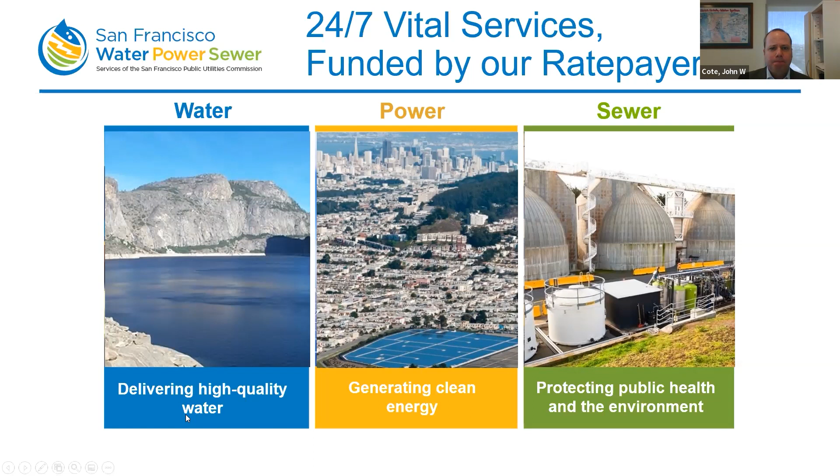Additionally, we provide sewer services to the City and County of San Francisco. And our sewers and our wastewater treatment plants are the front line protecting public health and the health of San Francisco Bay and the Pacific Ocean. Next slide, please. So I'm going to just quickly give you an overview of our water and sewer systems and some of the key investments that we've been making. Next slide, please.

So we operate the Hetch Hetchy regional water system. It provides high quality drinking water to 2.7 million people in 4 Bay Area counties. The last fiscal year, our system delivered about 182 million gallons of water per day on average to San Francisco and our 27 wholesale customers. These wholesale partners also share the cost of system maintenance. They pay 2/3 and we pay 1/3 of those costs. So the system and the really high quality water it provides is one of the fundamental underpinnings of not just the economy of the Bay Area, but also the vitality of our region.

There are a few things that are unique about our system. One is that the majority of our water, about 85%, comes from snowmelt that is stored in a natural granite basin and is so clean, there's no need for filtration. Filtration is energy and chemical intensive, and it can also be costly. The water is delivered via gravity to the Bay Area, so no fossil fuels or pumps needed there. As the water flows to San Francisco, it generates clean, renewable energy that powers not only San Francisco's municipal services, but also things like public and affordable housing sites and some new residential and commercial developments.

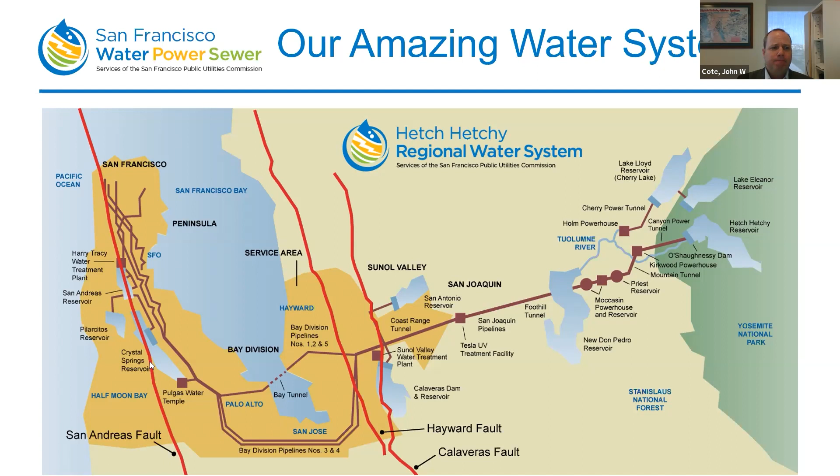Now, paid by your monthly bills, our services are always on. We've continued to deliver safe, reliable water through droughts, earthquakes, and the recent pandemic. Dependable, high-quality water is going to come out of your tap 24 hours a day, 7 days a week.

Our systems and staff conduct around-the-clock water quality monitoring. We also conduct regular inspections and preventative maintenance. And we have crews on the ground to carry out planned and emergency repairs across the city. Next slide, please.

So your investments have already made great progress. The multi-billion-dollar water system improvement program, which is to repair, replace, and seismically upgrade the most vulnerable portions of our water system, that is almost complete. So after more than 10 years and 87 different projects spanning 7 counties in California, the water system improvement program is more than 99% complete.

Now, the promise of this program is that within 24 hours of a major earthquake, we can deliver water to our customers. The program fortified major pipelines where they cross those earthquake faults we saw in the previous slide. It upgraded water treatment plants and reservoirs, also drilled 3 new water tunnels, and we rebuilt an entire dam in Calaveras. This program has really become the model infrastructure program that utilities across the country are now emulating. So part of your rates pay for these critical investments, and we thank you for that.

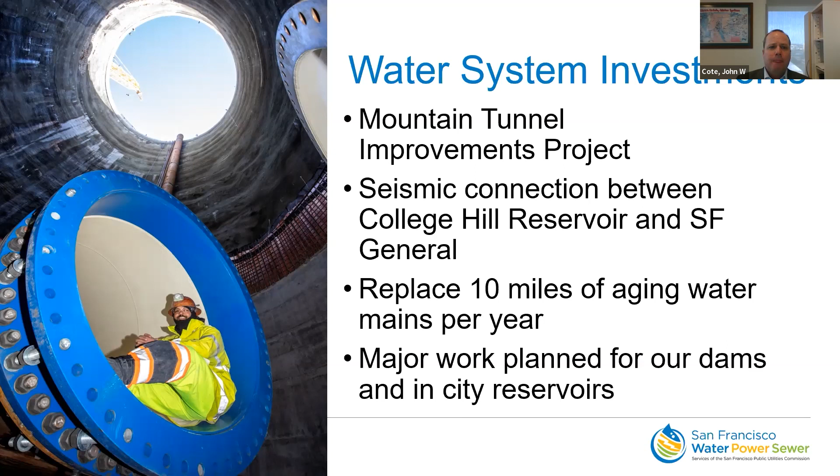So we must continue to invest in our water system so that it is resilient to droughts, earthquakes, and climate change. In addition, new state regulations might reduce the amount of water that we can serve from Hetch Hetchy in the future. So therefore, we've been working hard to diversify the water supply by adding a mix of new supplies to our regional system. Conservation is also a very important part of protecting our water.

And our residents in San Francisco have some of the lowest water usage in the state. And for that, we also thank you. However, conservation on its own is not enough. Next slide, please.

Now, with the major improvements needed to the water system either complete or nearing completion, much of our attention is now turning to our sewer system. So San Francisco is the only coastal city in California with a combined sewer system. And that means it collects and treats both wastewater and stormwater. So our sewer system is the first line of defense for protecting public health and the health of the bay and the ocean. The majority of cities in California discharge polluted stormwater untreated into water bodies. We do not do that.

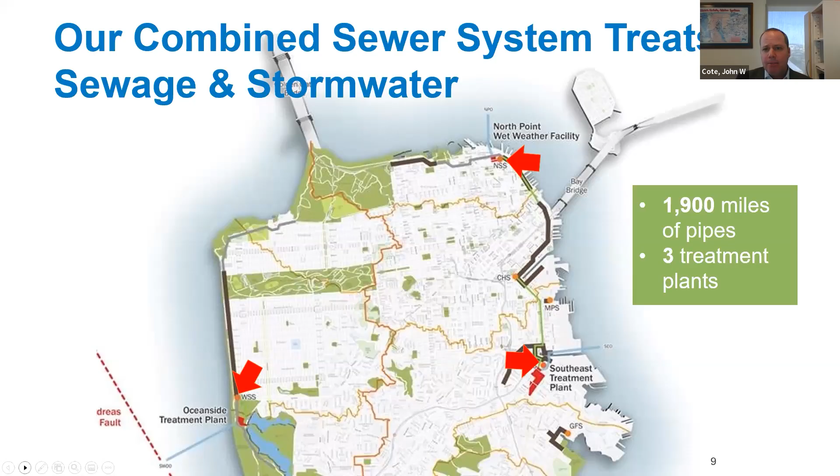So here you can see some of that need. So improvements are needed for both our sewers and for our treatment plants. As I mentioned, we know the next earthquake is really a matter of when. It's not if. So upgrading our aging water and sewer systems isn't just an investment in our city's infrastructure, it's an investment in public health. As we do with our water system, we replace roughly 15 miles per year of our aging sewer pipes, but really we are in a race against time to upgrade our old sewers.

We're also witnessing more and more intense storms due to climate change. I imagine everyone remembers earlier this year, we had a severe bomb cyclone that dropped over 5.5 inches of rain in a 24-hour period. So system upgrades that we're investing in will help reduce flood risk from these more intense storms. Next slide, please.

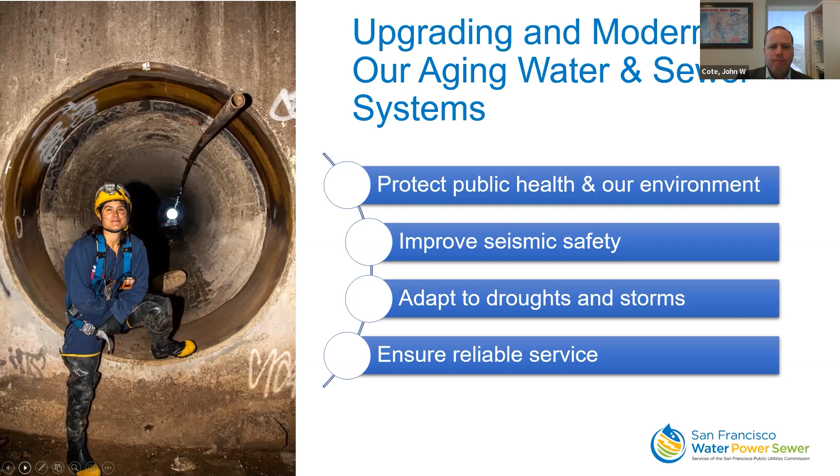So the year this photo was taken, William Howard Taft became president. New Mexico, Arizona, Alaska, and Hawaii were not even states yet. So what year do you think this was? We'll give you a few moments to ponder your answer, and keep in mind, there's no penalties for guessing. So even if you're not positive of the answer, it doesn't hurt to guess. So why don't you give it a shot? We'll give folks a few minutes to complete that, and then we'll of course tell you the answer.

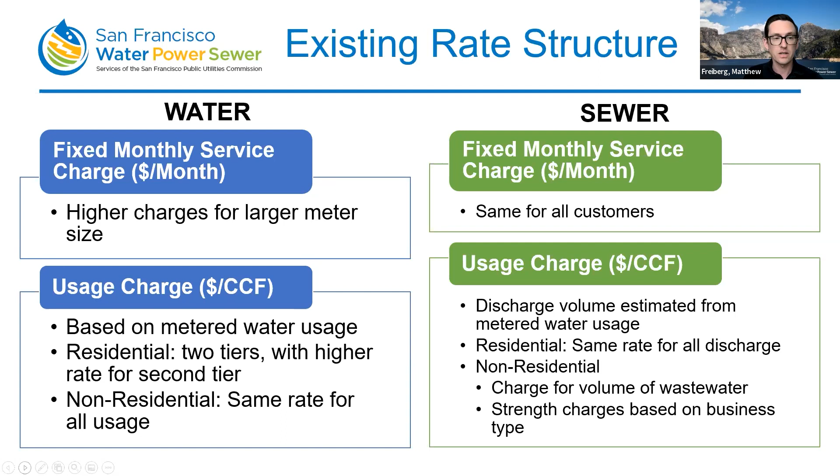In this rate study, we're recommending a change to the wastewater rate structure, which we're going to talk about more in the later slides, but the water rate structure at least is going to stay the same. Next slide, please.

Now, our team recognizes that times are tough for many San Franciscans, and we'd like to highlight the efforts that we've taken here at SFPUC to reduce the burden of rates on our customers. First, in response to the economic hardships faced by the COVID-19 pandemic, we held all rates level for the current fiscal year. However, this is not something that's sustainable for the utility, and we can only do it that one time.

Second, we have undertaken an agency-wide effort to reduce the cash needed to invest in infrastructure. This includes a strategic reprioritization of capital projects, which resulted in a $1 billion reduction in planned expenditures over the next decade. At the same time, our debt management team has been highly successful in obtaining low-interest loans. This has resulted in a $1.4 billion savings in interest payments that we would have had to make if we just used regular revenue bonds to fund our projects. And we're not stopping there. We are also pursuing additional low-cost loans as we need to invest in further capital. Next slide, please.

So with that said, I want to jump into what most of you are probably here for today, and that's what's changing with your rates. The proposed changes fall into two main buckets. First, the rates for both water and sewer are going to be going up. This is needed to cover increased operating costs, our existing debt service, and to pay for upcoming capital projects. Most customers are going to experience somewhere between a 6 and 9% increase in their bills each year, but this impact may be more or less for some customers depending on how you use the water and sewer systems.

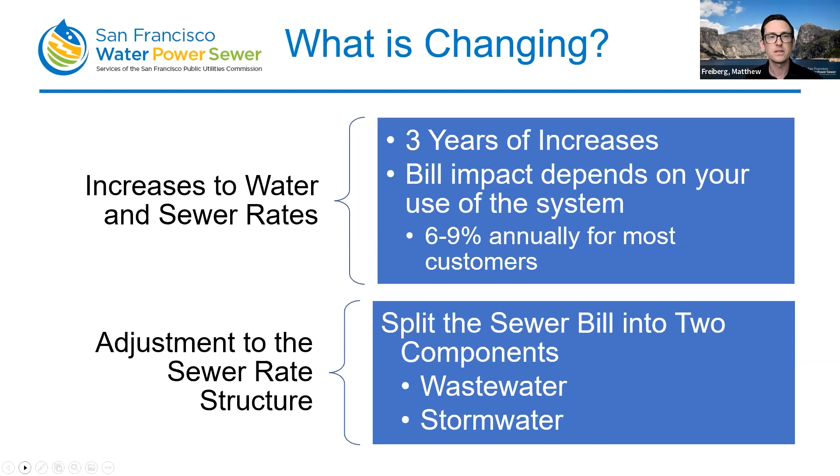So about 20% of the wastewater enterprise's costs go to managing stormwater. But the contribution of stormwater to our system is not the same for all parcels in the city. This new rate structure is designed to ensure that customer bills are not based solely on how much wastewater they produce from toilets, sinks, and showers, but the total flows that SFPUC has to treat from these properties. And this will now include stormwater.

The sewer portion of the bill, which is what you have right now, will maintain the existing rate structure that's based on the estimated volume of sewage discharged into our system. And the stormwater portion of the bill will be based on the characteristics of an account holder's property. So now those properties that produce higher runoff will have higher bills, and those who produce less runoff will have lower bills. This way, each customer will pay their fair share for the combined sewer system.

And while this is a new change that will show up on your bill, this new rate structure will not change the total amount of revenue that's collected by SFPUC. The added stormwater charge will be offset by reductions in the revenue that we'll be collecting through the wastewater charge. So most residents will see very little change to their bill as a result of the change in rate structure, but properties with larger surface area will now pay their fair share for the collection and treatment of stormwater.

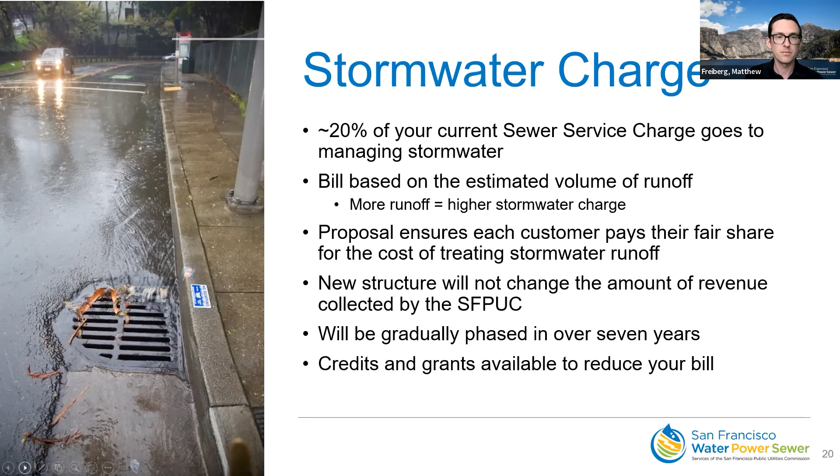Now, by adjusting our rate structure, we're correcting that billing inequity. And now each property will pay their fair share based on the total flows that their property produces instead of just the wastewater. Next slide, please.

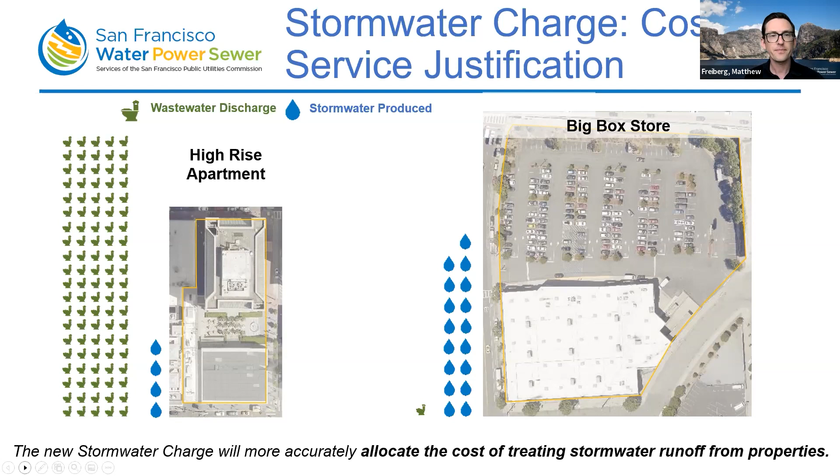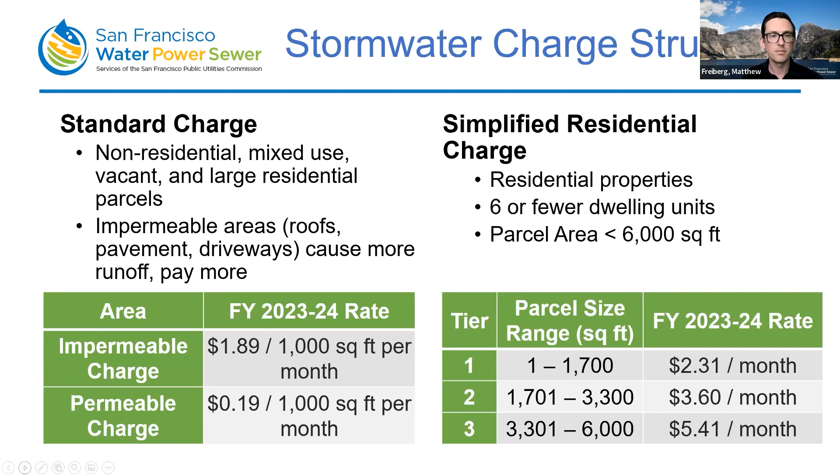So I want to take a moment to talk about our stormwater credits. Similar to the way we offer lower water and wastewater bills for conservation of water, our stormwater credit program will enable customers to lower their sewer bill by installing green infrastructure projects, such as rain gardens, green roofs, cisterns, and permeable pavement, just to name a few of the various infrastructure types.

In this particular property, they're managing 60% of the runoff that would have flowed into our combined sewer system. And in turn, this property is receiving a 60% credit on their stormwater bill. The properties that will automatically receive a credit are those new and redeveloped projects that are in compliance with our stormwater management ordinance. Any projects that have been funded through the Green Infrastructure Grant Program will also automatically receive a standard credit.

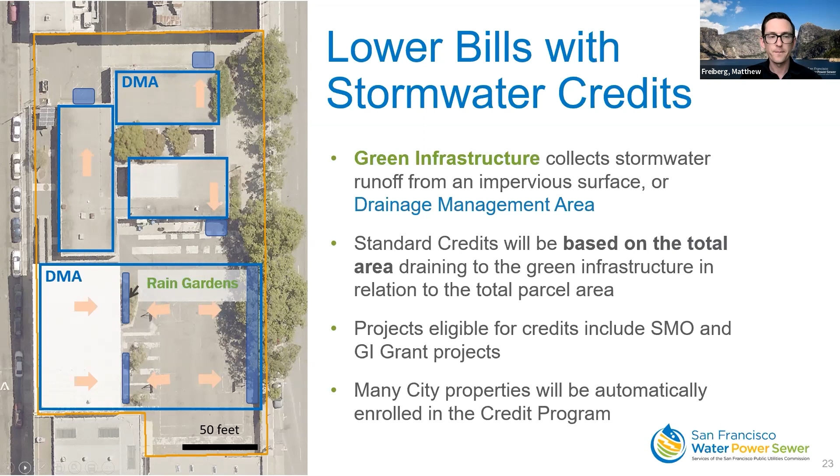The resulting bill impact for the proposed rate increase, along with the change in rate structure, results in about a $7 per month increase in bills for fiscal year 24. So that's starting July 1, 2023. The following year will result in about a $12 per month increase, and the following year after that will be a $13 per month increase in fiscal year 26. Next slide, please.

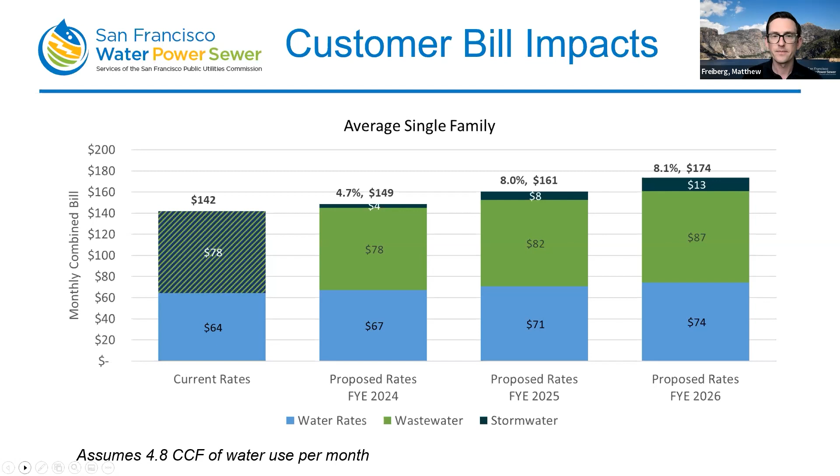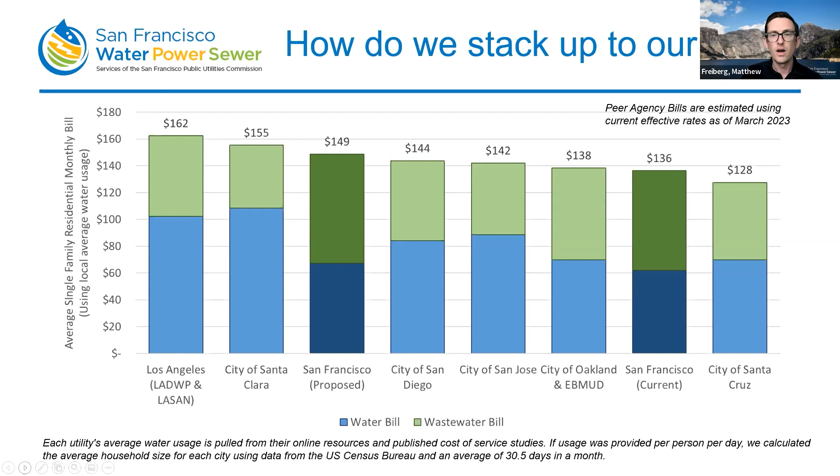Next slide, please. And with that, I'm going to pass it back to John Cote, our resident quizmaster, for the next quiz break. Thanks, Matthew. Appreciate it. So you'll see a little question and answer box pop up on your screen now, and we're doing a little bit of a different quiz on this one.

While folks are thinking about it, I just wanted to note that Mountain Tunnel is the largest water infrastructure project that we have ongoing right now, and it's the largest since the new Calaveras Dam. And the majority of these proposed rate increases would go towards important projects like these. Now, with that, I think folks have probably had enough time. Can we see the results, please?

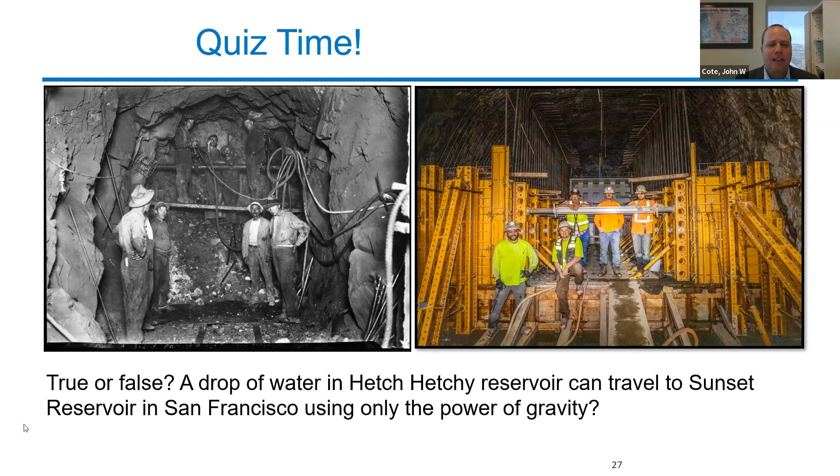So, as Matt noted, we really recognize that a rate increase can be difficult for some of our customers. And we want to emphasize that we're cognizant of that, and we're taking steps to address it. So we have a number of resources that are available for you right now. One is an online bill calculator. You can go onto our website, sfpuc.org/2023rates, and you will find a bill calculator that allows you to input information about your specific property or home, and then get back a customized estimate of how this rate proposal would affect you.

Additionally, we offer a number of programs where you can save money on your bills. So community members with low incomes can go on our website, same spot, and apply for our customer assistance program. This program provides an automatic 25% discount on water and sewer bills for low-income customers. Applying is simple and easy. Again, it's on our website, sfpuc.org/2023rates. The application is in 8 different languages, and it only takes a few minutes to complete. We're also in the process of expanding that program to extend even more help to those who need it most.

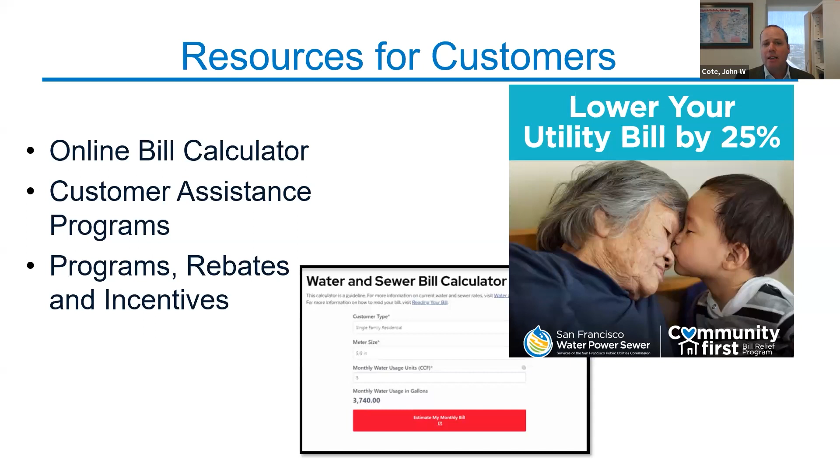As part of this rates proposal, we're conducting extensive public outreach that really is inclusive and multilingual in its focus. A formal notice has been sent to all account holders about the proposed rates. We're doing direct outreach to 30 different organizations across the city. We're holding these virtual town halls.

Thank you for attending this first one. We have 2 more that are coming up this month. We also have that website that I mentioned, sfpuc.org/2023rates, which has that bill calculator, those money saving options. We also have a dedicated email address for customer inquiries about this, and that is